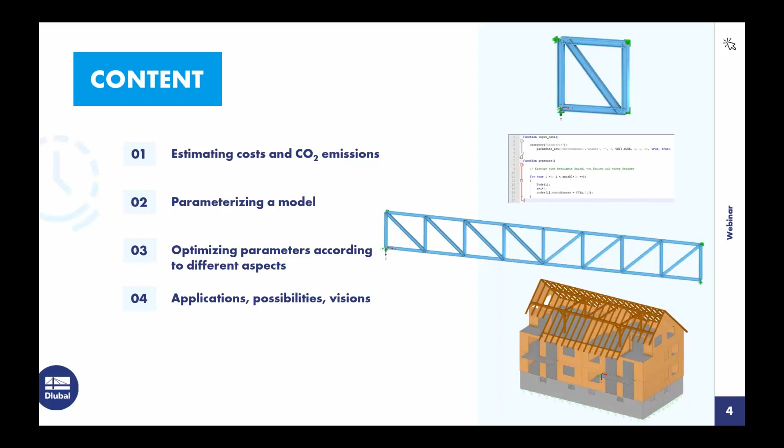So now it's time for me to change to the program because I want to show you this live today. I close this window and jump into RFEM, our new generation program. Before we start with optimization, we have to first define a new model. For this, I define a name, for example PO1, and specify the tasks I want to do. When I speak about essential tasks, I always change into this register, add-ons.

This register shows you all our add-ons available in the program: design, analysis add-ons, special solutions, and here our focus add-on today, Optimization and Cost/CO2 Emission Estimation. I agree, a quite complex name, but it should show you what it can do. It also has a special place in this menu: it's not allocated to special solutions or analysis add-ons. It's in the lower right corner to show that it globally covers the design add-ons, but also the other add-ons. It's lying like a skin over everything, because if you want to optimize something, you have to consider nonlinear material and also designs.

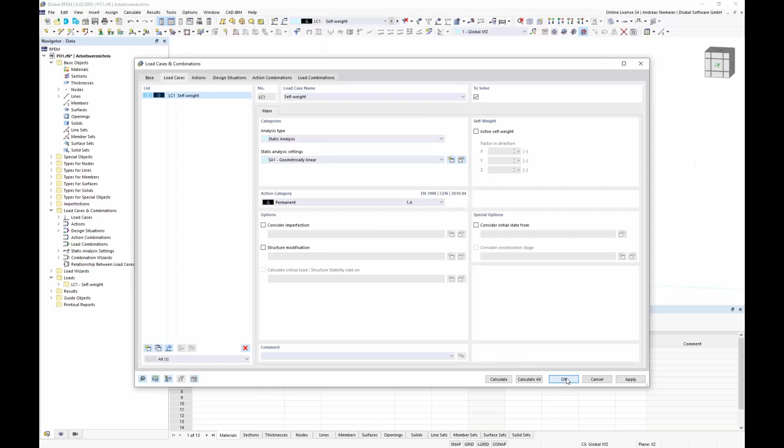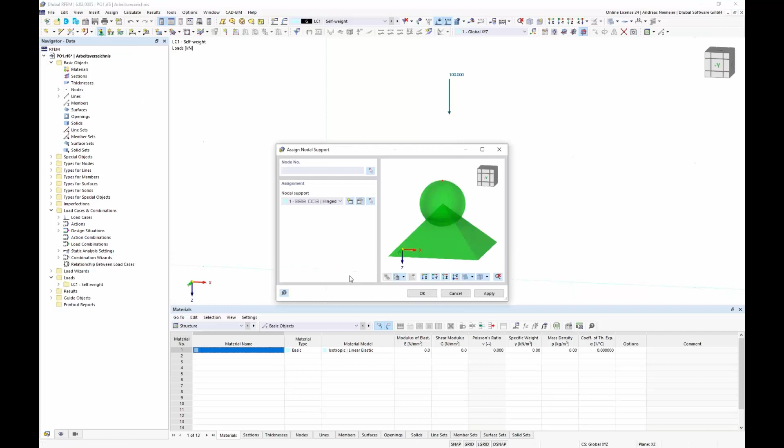So this means I want to load this element with a typical load, let's say with a unit load here. So no self-weight. I apply here only a nodal load, for example 100 kilonewtons, and this 100 kilonewtons should be carried from this element to 2 nodal supports on the left side. So here the nodal support is on the bottom corner, a translational support in all directions, and on the upper side we make also a new nodal support, but without having any constraints.

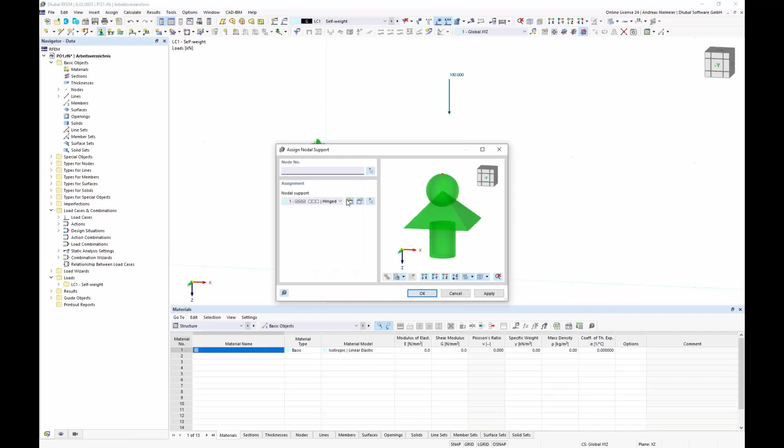So I place it here. And so that this structure cannot rotate around the global z-axis, I place also here 2 supports in y direction. So these are my boundary conditions and should show you my target place where I want to operate now. So if you see this load and you see these supports, our task is how we can carry this force down to these supports.

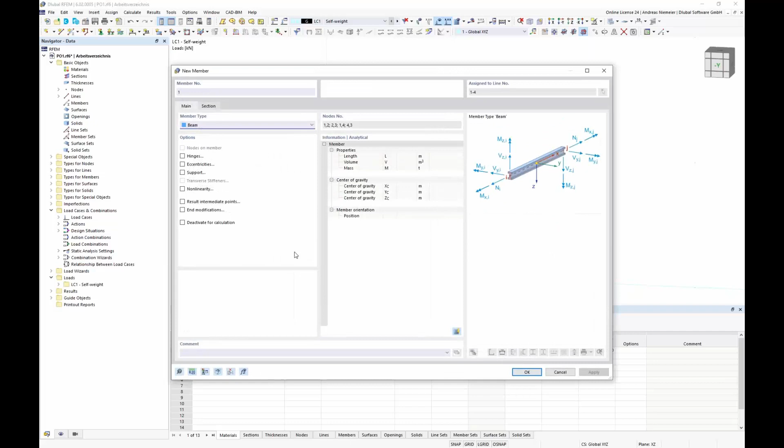I can create here now, for example, a wall or a member set or a mixture of both or a solid. So everything is possible. But for explanation today, I use simple members. So I select all 4 lines and assign a member here. So go to options, member. I take here the member type beam and assign here a cross-section.

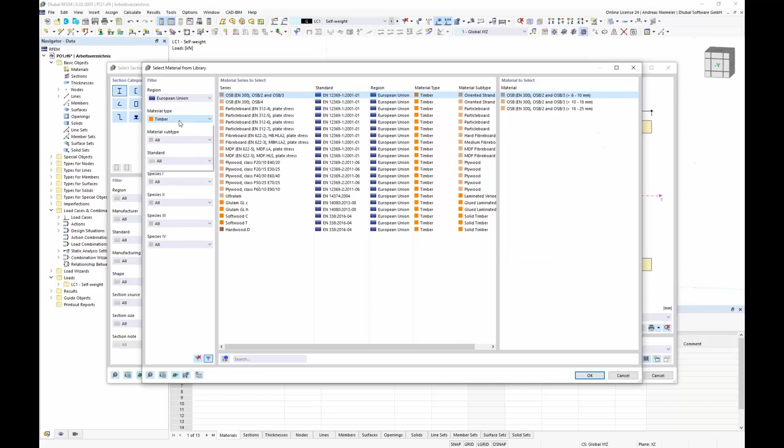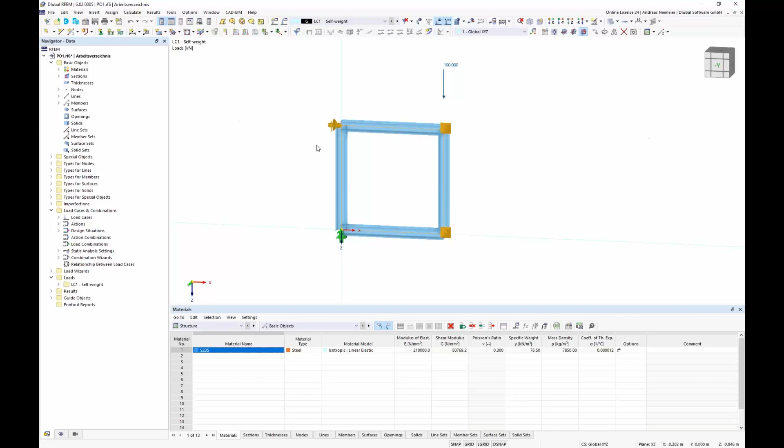For such examples I always use my favorite cross-section, an HEA 100, of course with writing a space here, and I select it here with a standard steel, so steel S235. So okay, after confirmation we get now these 4 HEA members. They are connected, rigid, but this plays no bigger role here. It's only a structure that can carry the force down to the supports. This we can also check.

So if I run the static analysis, you will see that we get here, of course, deflection. So we have here 14 millimeters deflection, and of course we get here internal forces, axial forces, here tension, here compression, and even bending. So we can realize that this shear is transported via bending to the supports and produces here reactions.

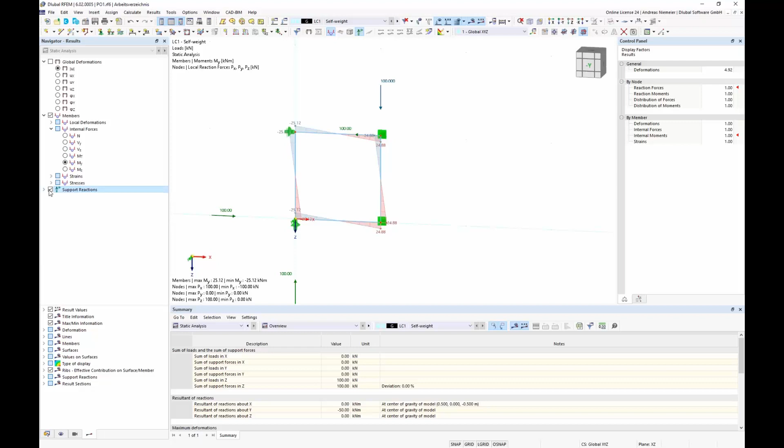So far everything is as expected, but as structural engineers, if you see this structure and even if you see this deflection shape, you would say, yes, nice structure, but we need a bracing in it. And I agree. I would also model here a bracing, but I don't want to tell the computer now what is the perfect place of the bracing. I expect from the computer that it will tell me what is the perfect place of the bracing, and therefore I say here now, please have here a bracing in the middle.

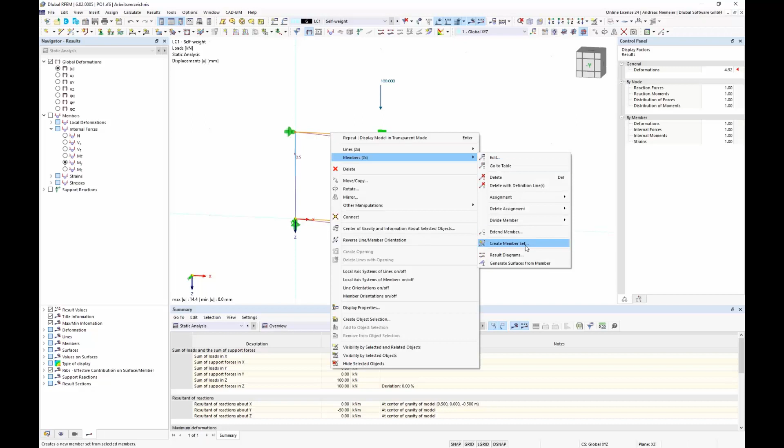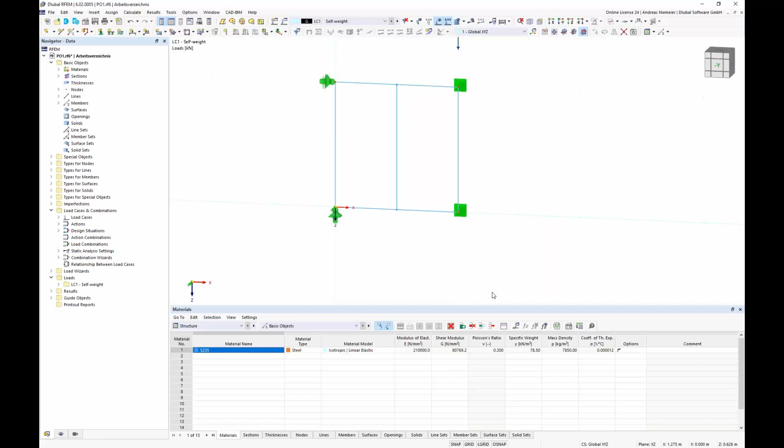So I divide the member with intermediate nodes, create here a middle node by placing the node on member, and then I take here one leg and copy it here in the middle. So far we have now a bracing. I don't want to say now if the place or orientation is good. It's only a, let's say, stupid bracing.

And if we run analysis again, we will see, of course, this bracing increased the stiffness, and we could reduce the deflection to, let's say, 8 millimeters. But the deflection shape is still the same, and we can think about the orientation or inclination of the bracing. And I would say now this is a job for RFEM, for the computer itself, so that RFEM can find the right place for this bracing.

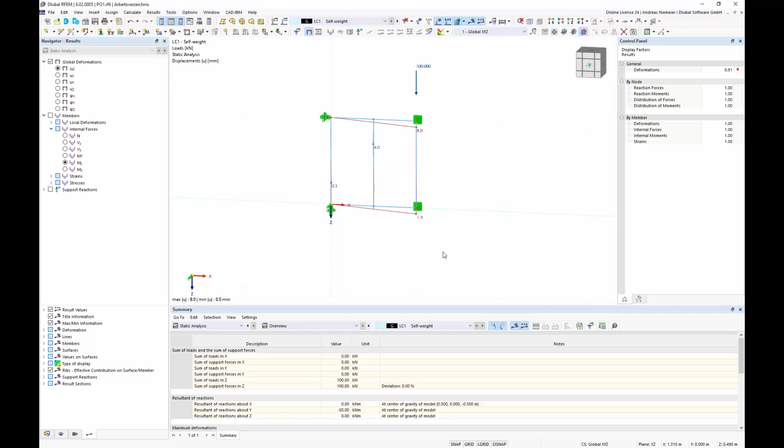We have to give the computer the information what it can change to find the right place. And here it's clear for us we can maybe move this node in left direction or right direction here, and even here move the node in left or right direction.

And if we define this variability, RFEM has an option to find this place. So at first we have to specify this variability to start this searching process. And maybe you noticed it when I divided this member: you see we have here red nodes, we have here blue nodes. So this blue node is a special node.

It is a node on member and gets its place according to a distance from member start and end, but lying always on the member. So it means if I change here from 0.6 to 0.7 or minus the distance, the node will move. And this is exactly what we want.

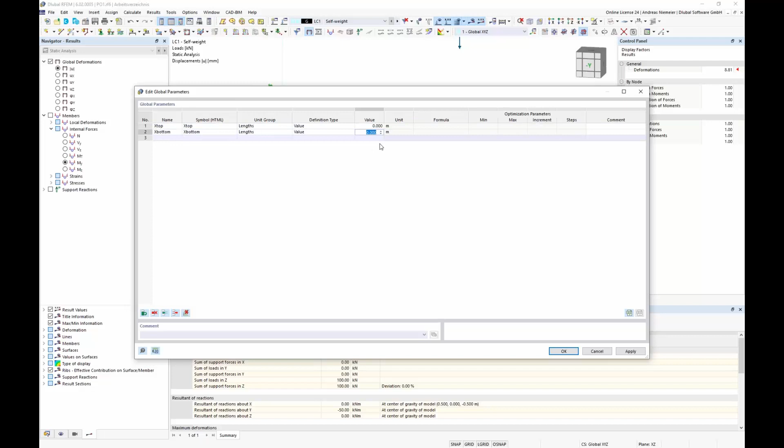And for this I define two parameters. I go here to Edit, Global Parameters, and here I have a parameter list where I can specify, and I say the first parameter is x top, and the second is x bottom. So the parameter gets the unit type length, with, in this case, 0. Of course, I can write here a value, but I want to have here 0. And now I use this length parameter to move this node.

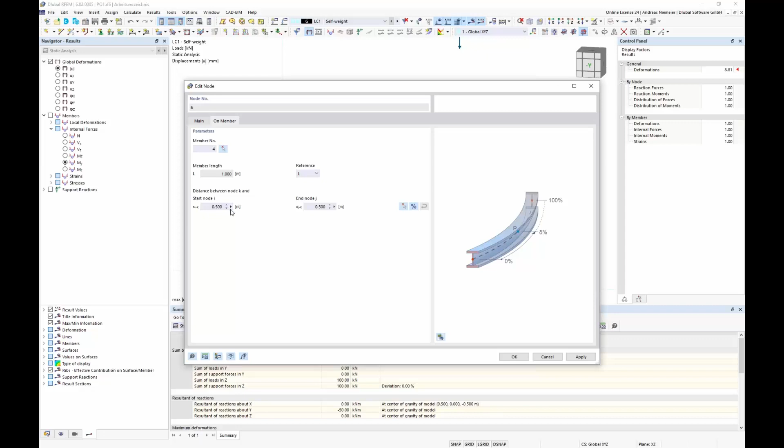And for this, you go into the node properties and change here to length definition, go here on this black triangle and open this formula editor. And you see you have here a big white box where you can write a lot, but we can say here 0.5 meter plus x top. And you see the program calculates directly the result of this parameter. It's 0.5 because x top is 0.

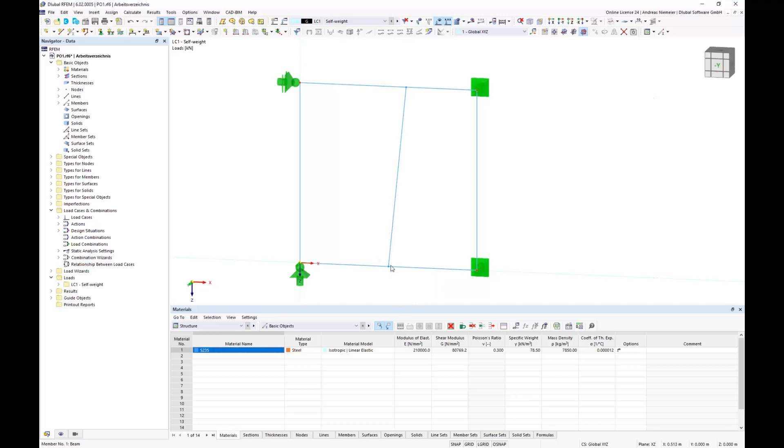But when we go now into this parameter list and change this parameter to 0.1, you will see that the program is moving this node. So we connected now the geometry to this parameter. The same we can do for the bottom. Here I want to go one step further. We wrote now in this formula editor 0.5 as a fixed value. But what happens if you move this node and it's not 0.5 but something else?

So to cover this, you can go into this node details, change it to meter or length as before, and open it again. But maybe you realized we have here two buttons. The button with this i is an information button which gives you a command list you can use to connect to properties of the program inputs. This is in JavaScript style and allows you to connect to every element of the program by JavaScript code.

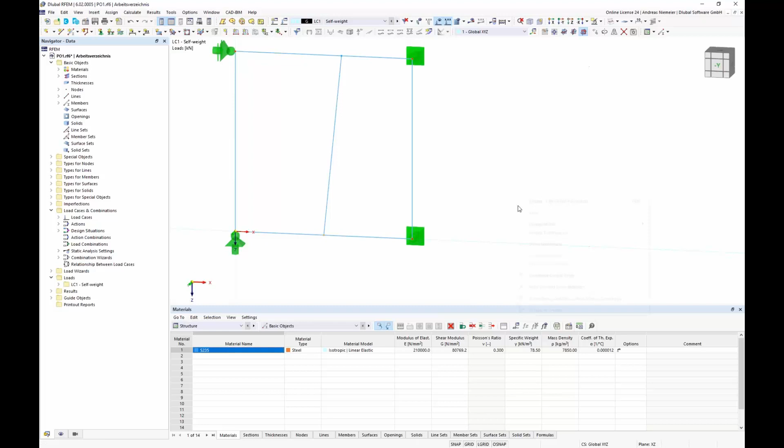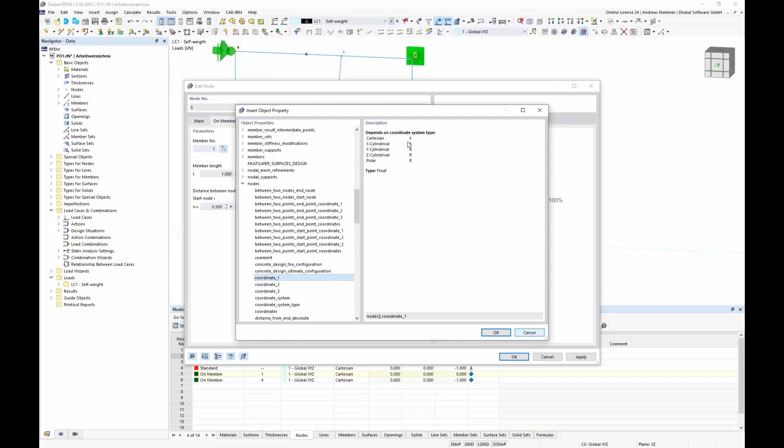For example, if we want to connect to the node coordinates of node number 2, then we can go again here in this node property, meter, formula editor, and type n, nodes, and you see you get here commands that touch the node, and for coordinate x you can connect here to the x coordinate. And if you confirm this command and write node 2, you will get here the value 1, which is written in the table, and this you can divide by 2, then we have a half meter plus x bottom.

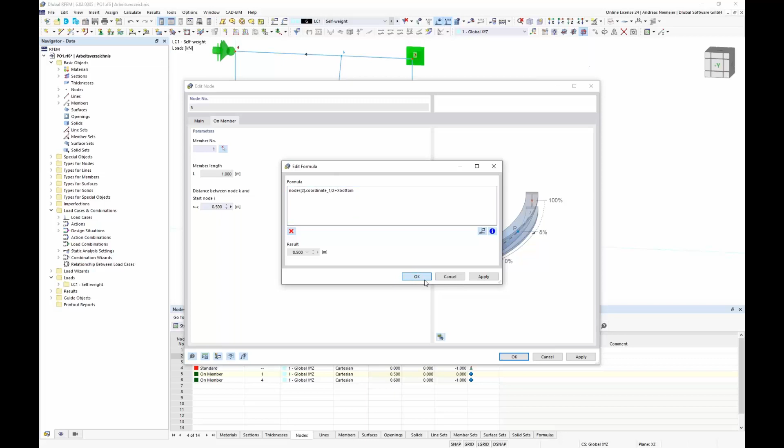And so you can write your own code to work with values of the input data itself, which enables you to make a good parametrization of your model. And now we have an option to change this bracing member in both directions by typing in these values. Of course, this is not the optimal place. It's much more optimal when we move it completely to the right and left side. But this is the task of the computer later.

So now we have done this parametrization, but the question remains how the optimization can work with these parameters. The optimization, which we activated in the base data here, enables you below Calculate the optimization settings menu. And you see here you have a few options and you have values to optimize. Unfortunately, this list is empty. This list is empty because we have to declare which variables of the global parameters should be optimized.

For this, if you open the scheme again, you will see that we have below the column definition type a few options. We have values, formulas, optimization, and some special types of optimization. And if you give this parameter the type optimization, you will see it's going red. This means something is missing. The cause is that it wants a range for optimization, from which value to which value the parameter could go. So I describe now the parameter should run from minus 0.4 to 0.4 with an increment of, let's say, 0.2, for example.

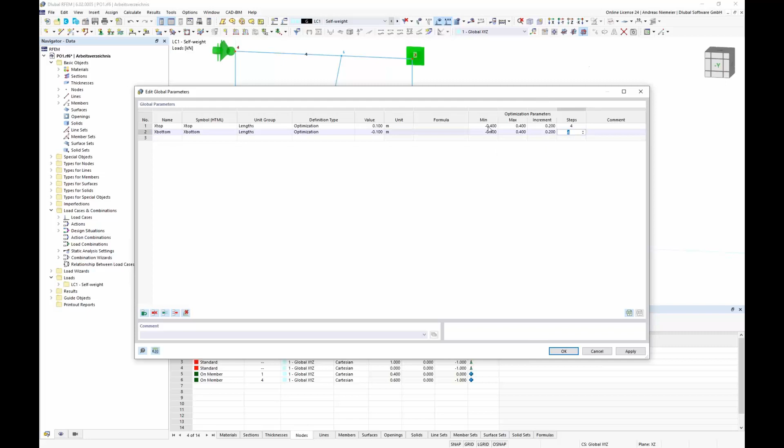And if we confirm this, and let's say we start here from 0, like in the beginning, and open here calculate optimization settings, you will see you now get these two optimization parameters available to optimize. Because we have these 4 steps, it finally ends in 5 states, and because we have 2 variables, it ends up in 25 different, let's say we call it mutations.

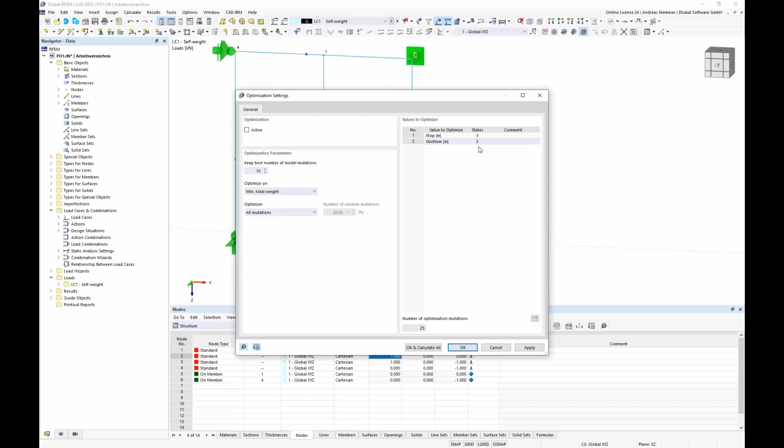Mutations means the value could have the first and here the second state, or the third and the 5th state. So there exist 25 different situations, which means for us 25 different models where we have different geometries in this case. And we defined here the name mutations for these different models.

And now if we want to find the best solution, let's say best in brackets, we can activate it here with this check, and you get 3 options to specify. The program asks us keep best number of model mutations, and here is written in standard 10. The question is best models. Of course, here we speak about 25, so it's not so crucial.

But you can also work with 1 million, then you don't want to read 1 million. So it's interesting only to store the best 10 results. But for our upcoming analysis, we can write all, only to understand what happens. Then, because the word best raises the question, what is the best? Here we have to specify below the chapter optimize on, when the program is changing these variables.

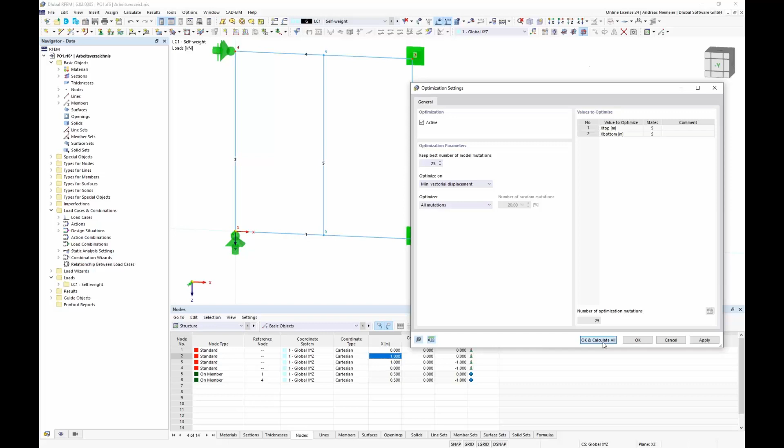And if we do this, and start here OK and calculate all, the program opens a calculation process, but it looks a little bit different. It's more an optimization process where you see which optimizations are done. And in the background you see what is changing. It calculates the different mutations, and when it finishes the calculation of one mutation, it logs it in the table connected to these 10 best results, for example.

Now we log down 25 best results, and you see it has measured here the vectorial displacement and the corresponding parameter set. The best vectorial displacement, for example, happened with solution number 5, if it moves the top node 0.4 meters right and the bottom minus 0.4 meters left. So this is our expected place, which is really good. All others are not so good, so you see we get bigger deflections. But of course it's a stupid process because it calculates all available.

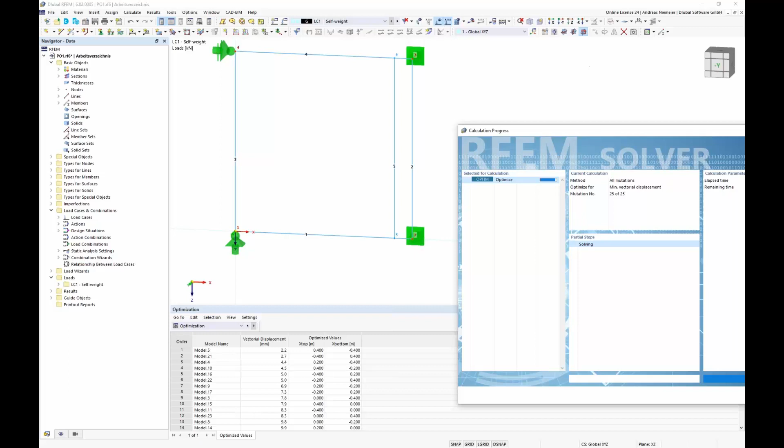And if we jump back now to our program, you see meanwhile he's already done with his analysis. He's on the 25th solution, and meanwhile the list is filled with the results I just presented to you on this matrix. Of course he also calculates some stupid solutions here, but this comes only from the process that we've tried to use all values.

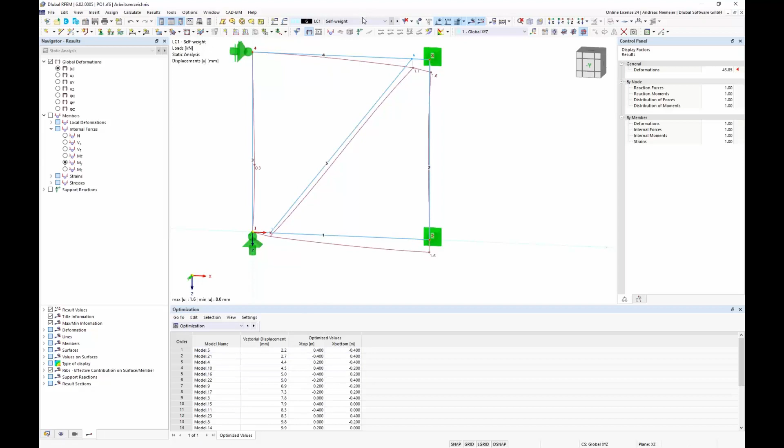And what I want to present to you with this step now is that you have to wait for the calculation of at least 25 models to get a result, to find out that maybe model 5 with this parameter layout gives the best result. We have here 2.2 millimeters, but this is only because the program is directly considering this design situation with increased values, where he has this partial safety factor, because when we calculate this, you get exactly this 2.2 millimeters.

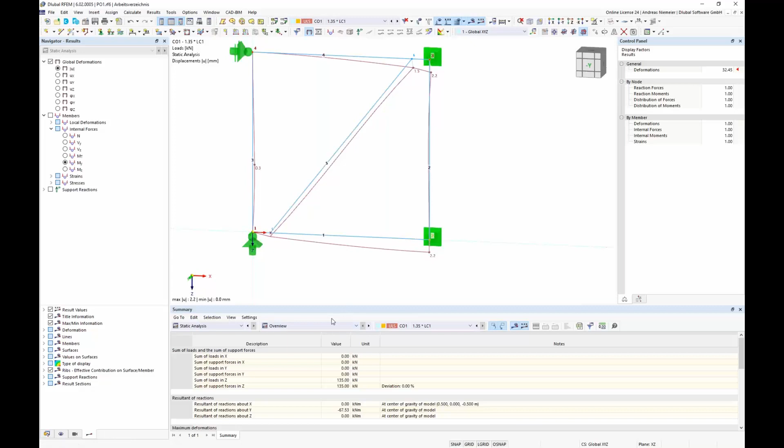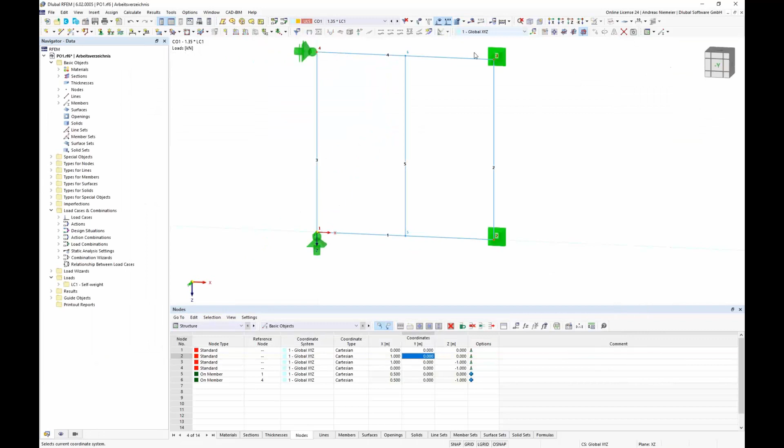So now the question arises, can we do this faster? And yes, we can. So we set this structure back to its original place. So this is the best parameter set he found. But we ask the program again to find this solution much faster with a learning process.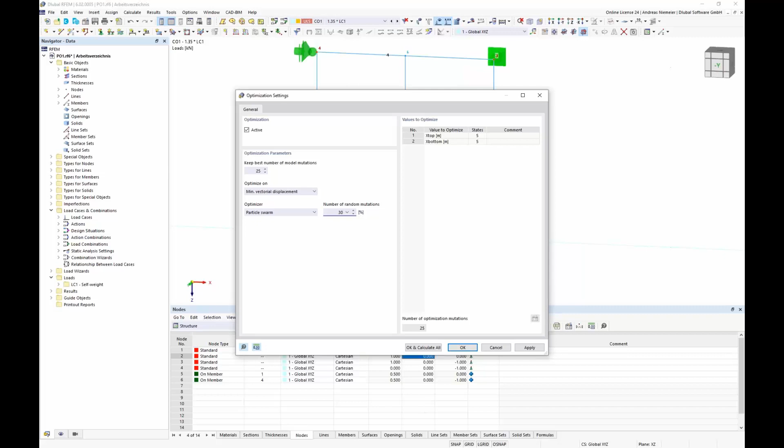And here we go back to this menu, optimization settings, activate it again, and say now, please use as optimizer this particle swarm algorithm, which is a learning process, using only a fraction of all possible variants or mutations. So I give a basic input, for example 30%, which means 7 elements of all, and the task is now to find a good result within the calculation of 7 mutations. I start the process now.

For this he has to start with a random selection of parameters, do the calculation and realize, okay, my first calculation gives a not so good result. Then he tries to find a better parameter set by knowing what gave him a bad result, finding a better deflection until the 7 mutations are over. So his game is to find a good solution within the 7 solutions.

And you see now the program was able, by using this self-learning process, to find a really good solution within the calculation of 7 models. Maybe here he already found the best solution, but this is not a must-have. The point is more to find as good a solution as possible, but you can save time with this process, because he learns that he has to change the parameter to get a smaller solution, and that he shouldn't increase the value in this direction but rather in this direction.

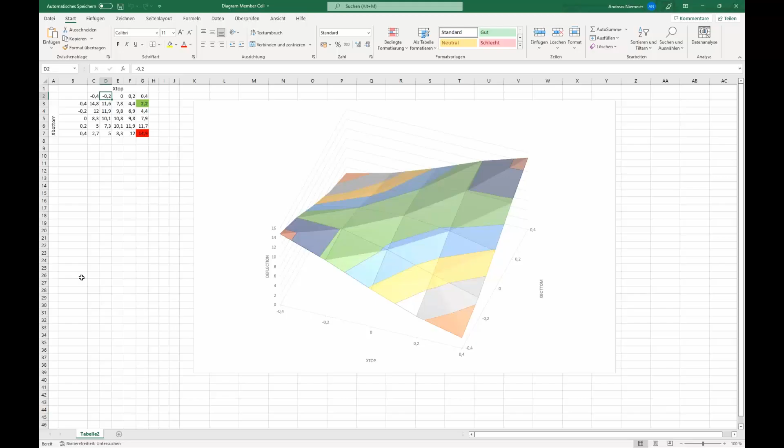And because these swarms have a need to rest, and the closer they come to the resting place, the more this need increases, mimicking this behavior helps to find these optimums here in this corner or this corner. So maybe we could prove this a little bit with this short introduction.

And now I want to open this topic by mentioning what we can use this for, because if you take a look at this cell, it's part of a truss girder, for example. And now the question could arise, thinking of my life as a civil engineer, if you try to use a truss girder for supporting some loads, how many cells should I have? Do I need 10, 20? I don't know. Then I can change the height of the truss girder. It's also unclear, and even the cross section.

What is always static or fixed is the length and the load. I cannot change those so easily, but what I can change is the geometry of the truss girder. But if you take a look at this current parametrization, you will see, yes, of course I can use it for truss girders, but this technology allows me only to change length and not the number of elements. And I agree, this is not possible here, and this is maybe the limitation of our old generation, RFEM 5. But with RFEM 6, we got a new mighty tool.

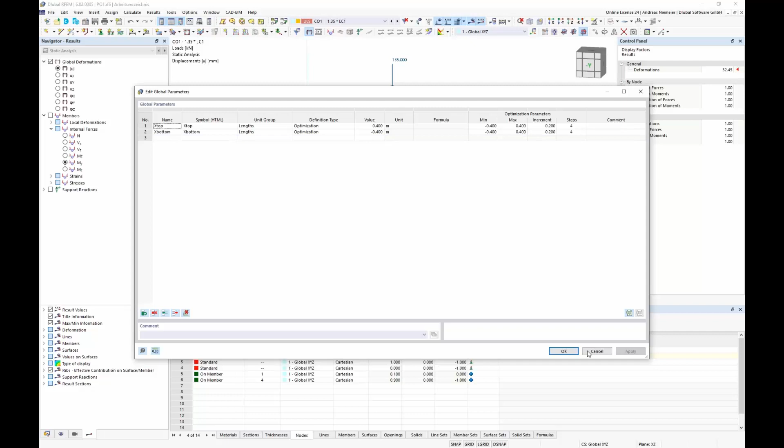We got this, let's say, JavaScript technology, what I just showed you before, where I can write per code elements. And I want to open this case here by opening a new model where we

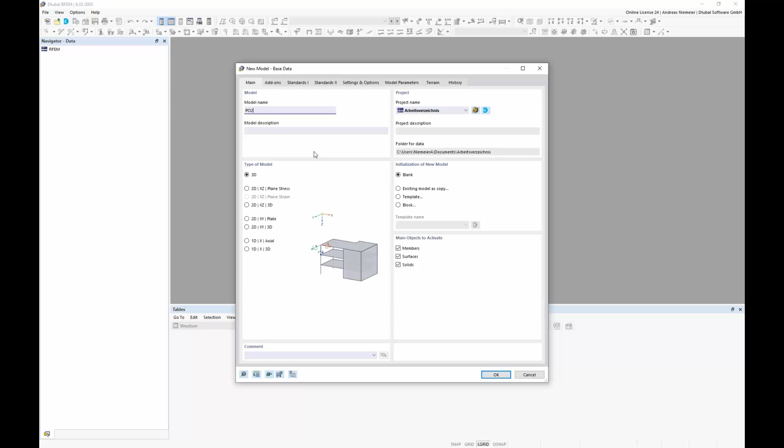create us, maybe here PO2 or truss girder, or not a truss girder, then more, how to say, I want to show you how you can create by a parameter new elements, what represents our task for a truss girder, because in a truss girder you also have to say, I need 5 cells, 10 cells, what means more members or less members.

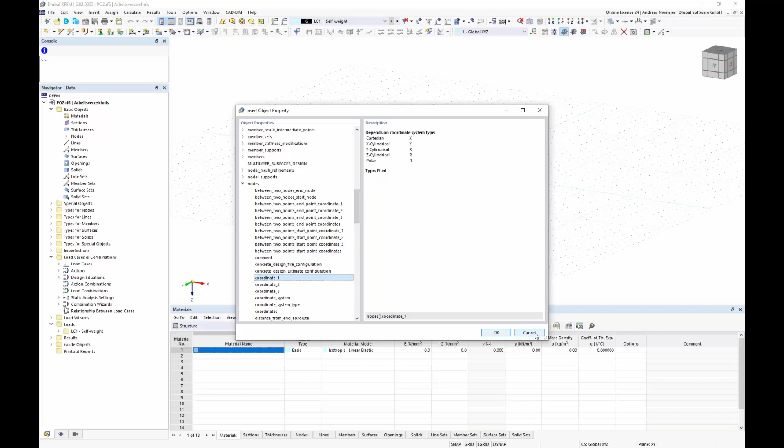And I want to show you now with the next sequence how you can control the amount of elements by using all these functions in the program. And here, as mentioned before, we have in RFEM 6 this JavaScript command catalog where you can connect to any element in the data block. And we have additional here a script manager what allows you to store this stuff.

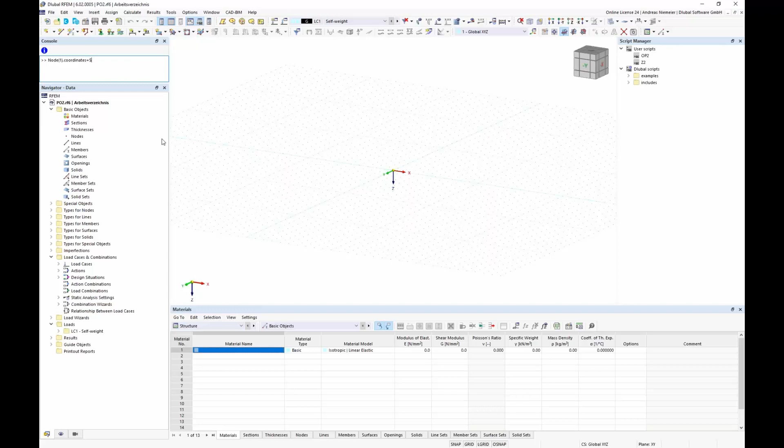How is this working? At the moment it seems quite cryptic, but for example, we want to specify a new node. So we can write in console by first checking the command for it. For example, we want to create a new node, maybe here in parentheses, node 1 dot coordinates, and the coordinates are a vector on the place 1 meter, 1 meter, 1 meter, for example. So with confirmation we can create now here a new node on 1, 1, 1. So this is possible right now.

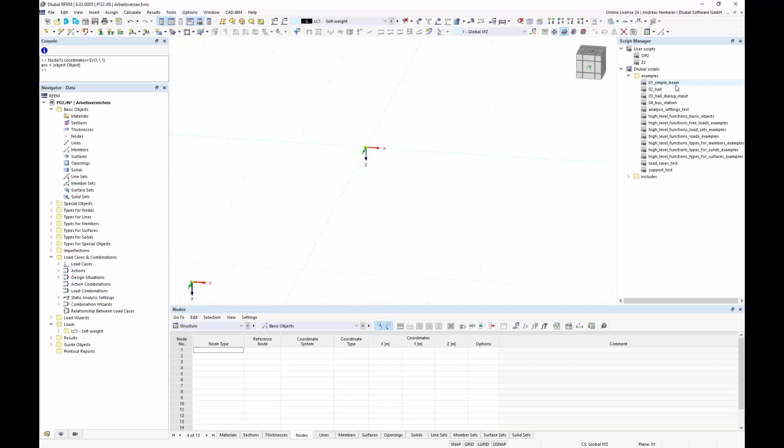Yeah, you can define on this console new elements, not only a node. So there's more possible. If you see in the script manager here on the right side, you have here, for example, a simple beam. If you double click on the simple beam, you get miraculously a new simple beam here with supports and loads and so on. So even you can create complete models with this technology.

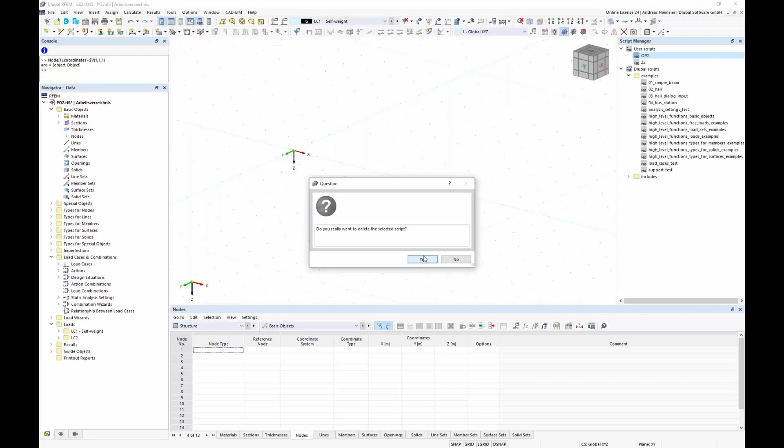Let's increase this topic how you can create such a script, because here we only use this console. So I copy this command, Ctrl-C, and create here a new script. So this last we delete, yes, and make here new script. We call it PO2. Okay, and then we can open it with an editor. I use here this Notepad++ editor, but you can use any editor what you want. It's only a JS file,

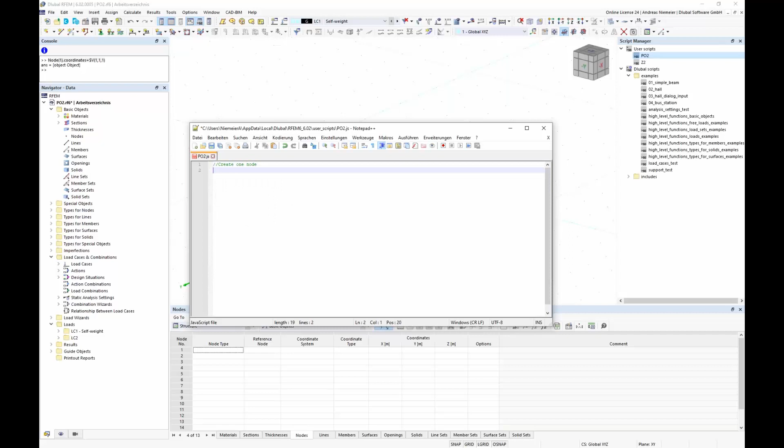and here we can write comments. For example, create one node, and I insert what I just wrote into console. Node 1 coordinates and so on, and I store this and double click PO2, and you will see you get this node again. So here you have the chance to write down what you want and store it in these scripts. So not so crucial, I would say.

Now back to our idea. We want to create more elements at once. How can you do this? I delete this again and open here my file and say, please create more nodes on one line. How to do this? If you work with more elements, you have to write, for example, a for loop. For a running variable, for example here, variable i, which is 1 in the beginning, he should increase the variable until this variable is smaller 5, and he should increase i always with 1 increment

in this loop. So, and here in this running loop, he should do something. He should always create a new node with the number of i when he increases it. Then he should create for every step an x coordinate. X is, for example, i multiplied with 1 meter. And he should move this information as node in the node table. So write nodes i, point coordinates,

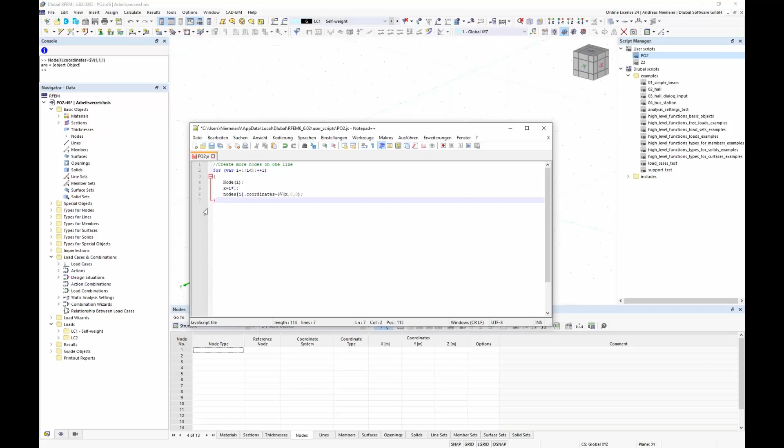and as vector again, dollar vector, and here we write x coordinate, comma 0, 0, that we have nodes on a line. And then we can close this command. The rest we delete, we don't need anymore, and can store this. And if we run this again, you will see, if I made everything right, we get a few nodes in one line. Because we stopped before 5, we get only 4 nodes.

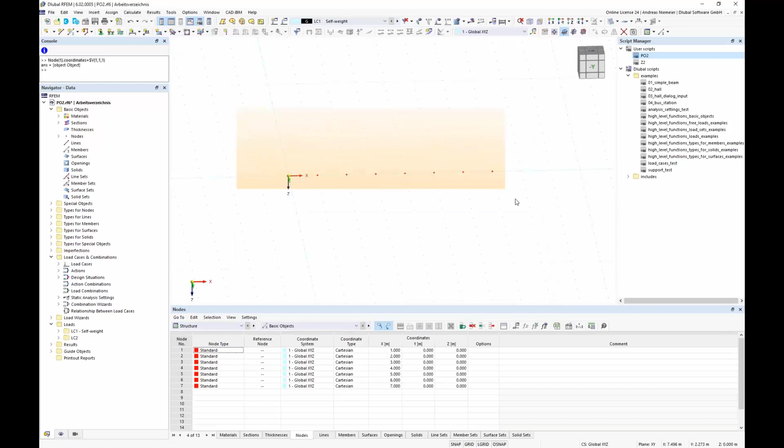Not so crucial. The only point is now how we can connect this parameter with the optimization here in this menu. And this you can do by using blocks. If you see here our blocks in the block manager, you will realize that we have here blocks for RFEM, different types, and if we open one block, you see it will create some structure.

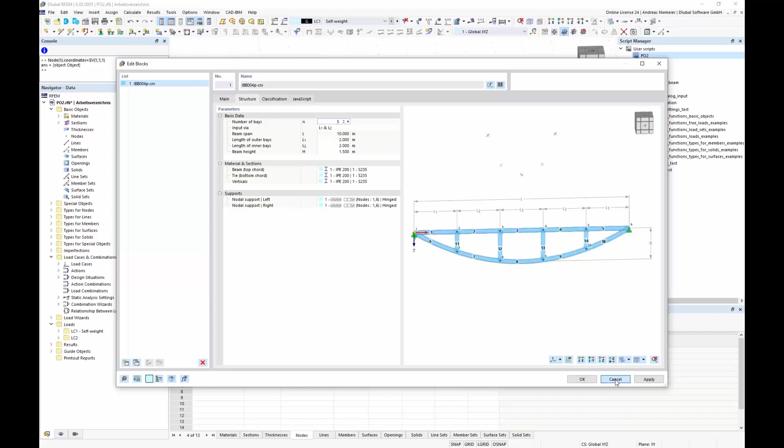It also has here in the back a JavaScript code with, let's say, here an input where we have these black triangles again where we can define something. And now we only have to take our code with these nodes and move it into this block logic. This is not so big a deal. It's only that we have to write here in the front that it should generate something.

So we need here the keyword or the function, function generate, and make here a curly bracket again. So nothing more. And now we have to store this file here. I prepared a folder for today's presentation below my temp folder. And now I say in the program, please save this file as block, maybe name PO2. It should select it here below beams, for example, and I use this JavaScript file below temp2.

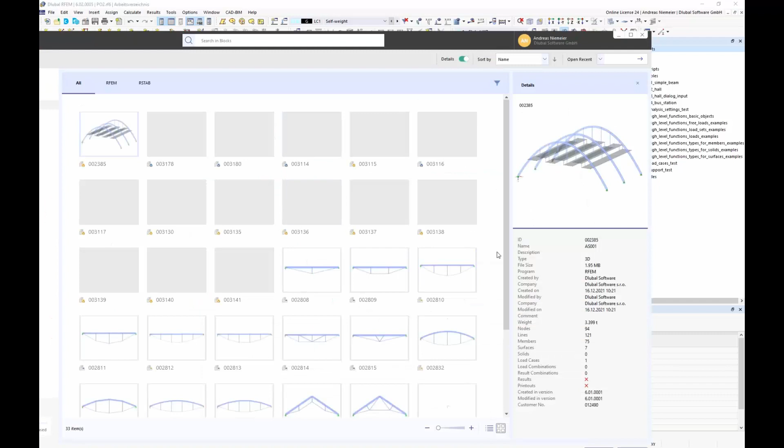And if I confirm this, the program is taking over this JavaScript file as a block into our block manager. And if we open the block manager again, we will get this block here. Let's search here PO2, and you will see we get here our nodes, 7 elements. Here's our code, everything clear. And now let's connect it, and we see we have no structure, because we didn't define it. It's clear. But now we do the last step and connect it with input.

And for this, you can open it again here and add an input block. We say here function input data, open here a region, and write down a header, for example, category, geometry. Of course, all commands I'm using here, we have a documentation we can send you afterwards. Should not be the deal. I only want to show you how it's working in the basic concept.

And below this header, we want to specify a parameter. It's an integer parameter, which has some properties. It has a name, and the name is amount of nodes. The next is the parameter internally encoded, amount, which we use here below. Then a unit should not be specified for this integer value. The starting value is, for example, 4 or 3. The unit type internally is unit.none.

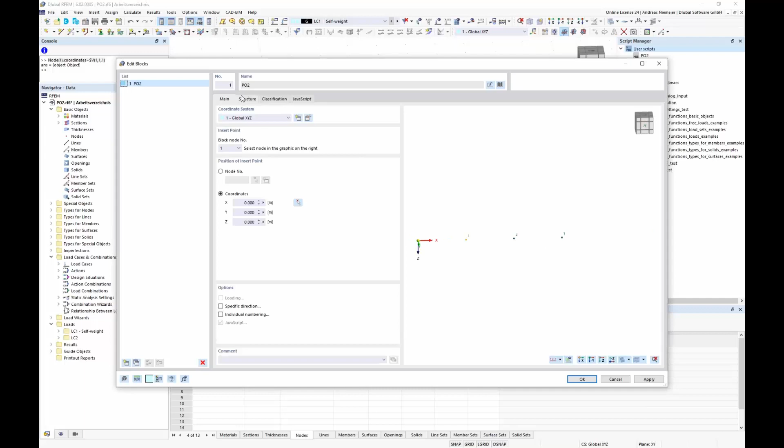You will get here in the block manager below this PO2 our 3 nodes, and you can change it here to any value. And now we take it over in the program, and you will see that you can have this block not only as simple nodes, but as compound elements below special objects, where we have this PO2, and we can connect here any parameter from the parameter list.

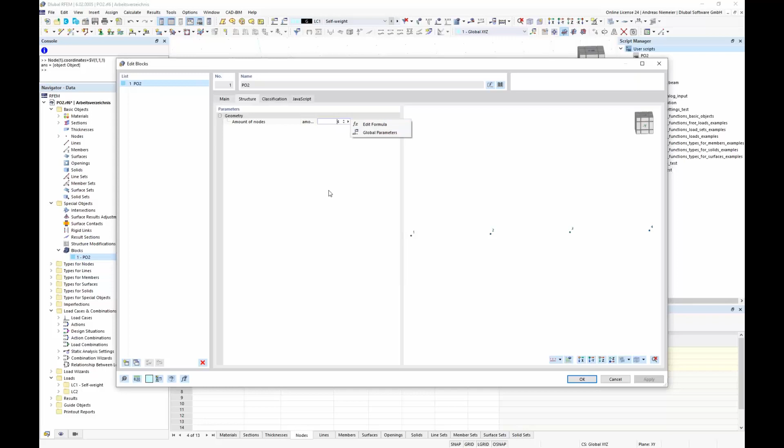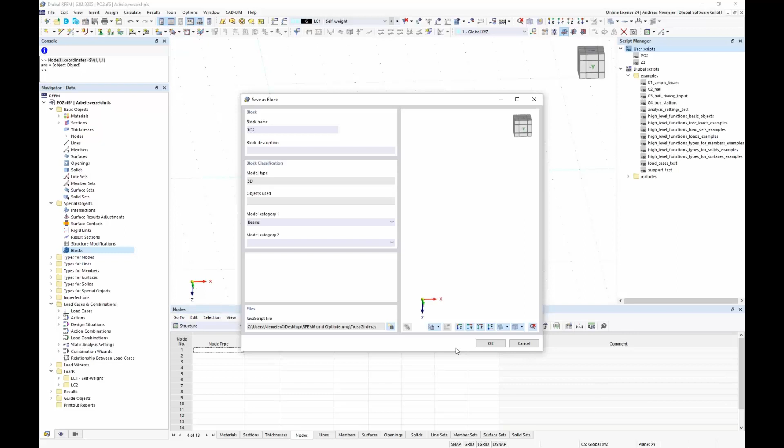So with this idea, we go back to our truss girder and use it. So we delete this again and use now a predefined file for a truss girder with members I prepared for you. And I save it as block, Truss girder 2, for example. We place it below beams, and I have here a file, truss girder, prepared, which is not only modeling nodes, but also beams and loads. And we read in this file as a block.

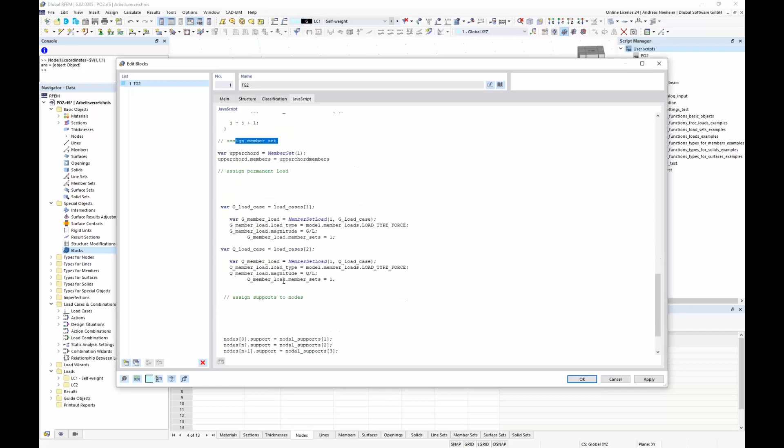And get this block here, TG2. Then you see we have now here a block which writes us an input file, function generate, nodes, member sets, loads, and so on. And here we can now specify we have 8 cells, we have a span of 20 meters, and we have a height of 0.5.

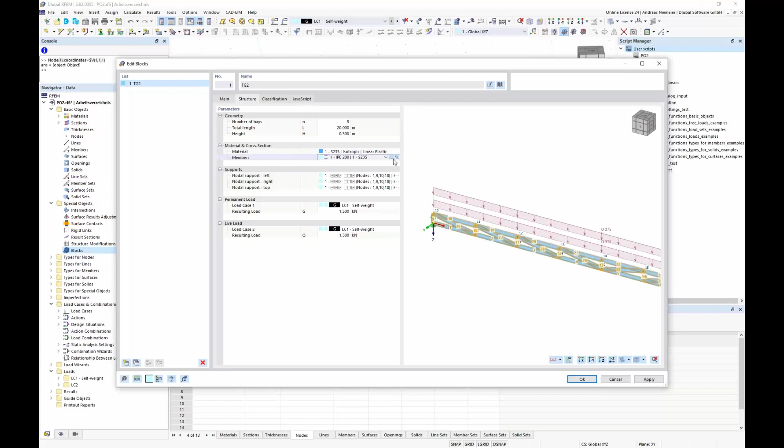It should start here with the material S235 with our favorite cross-section of our HEA. We go here in the library, HEA 100.

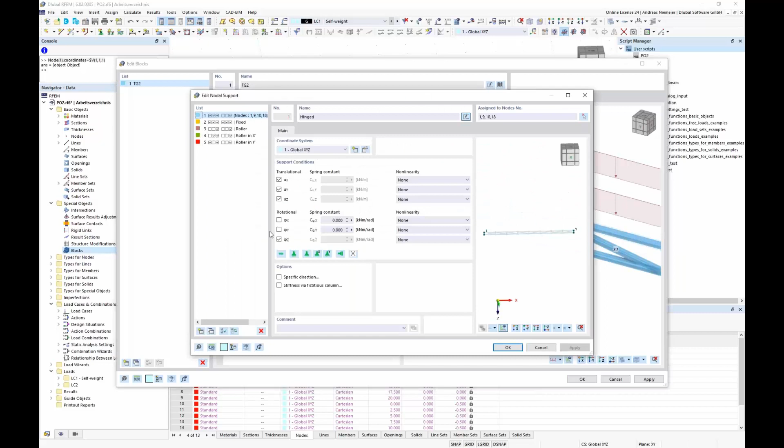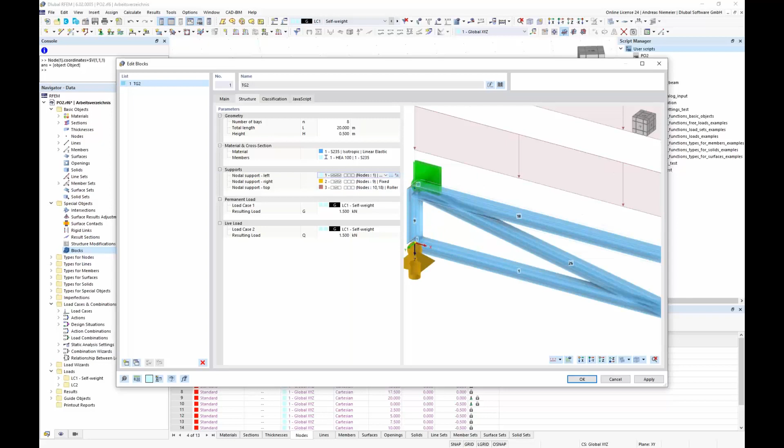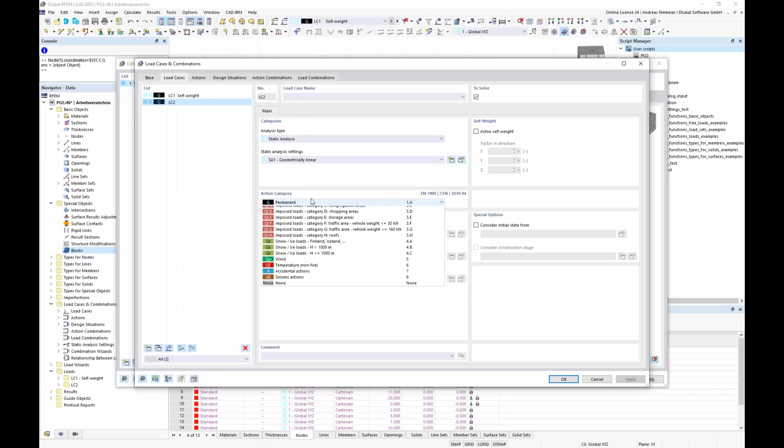And we have here also a clear support, and for the loading I defined it so that we get the sum of loads. For example, I have to carry 100 kilonewtons, which will be distributed homogeneously over the full length, and as load case we have a self-weight and maybe a live load or imposed load, and here we have to carry 200 kilonewtons.

And with confirmation of these inputs we get here our truss girder system with 2 load cases, and now we can connect it to the optimization. So we connect here our optimization. We specify here our parameters, for example cell, which is an integer value. So we go here to model integer and write here, for example, 4, and because it's an optimization variable we say it should run from 4 to 10 with an increment of 2.

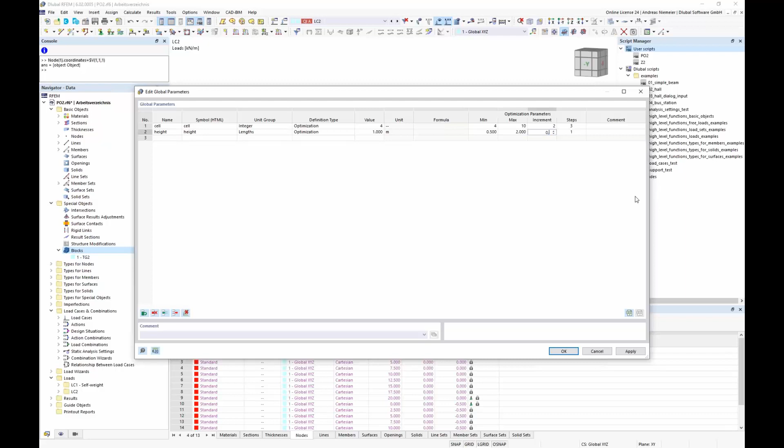And again we have, for example, also a height parameter. Here we have a length parameter which we set to 1 meter, and it's an optimization variable where we can say please run from 0.5 to 2 meters with a step of 0.5.

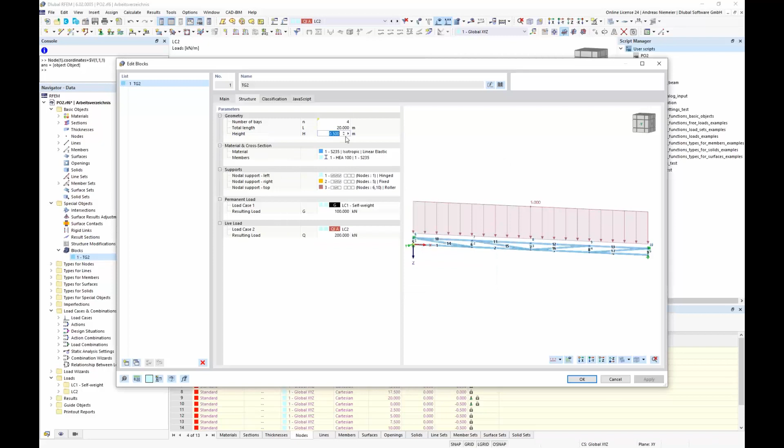And now when we use these global parameters, optimization parameters, in the variable block and connect them here with these inputs, formula editor, cell, okay, and height, okay, and confirm it, the program says you have to modify the geometry behind, and you see we have now connected these global parameters with the block, and it uses the code to change the structure, not only the structure length but also the number of elements.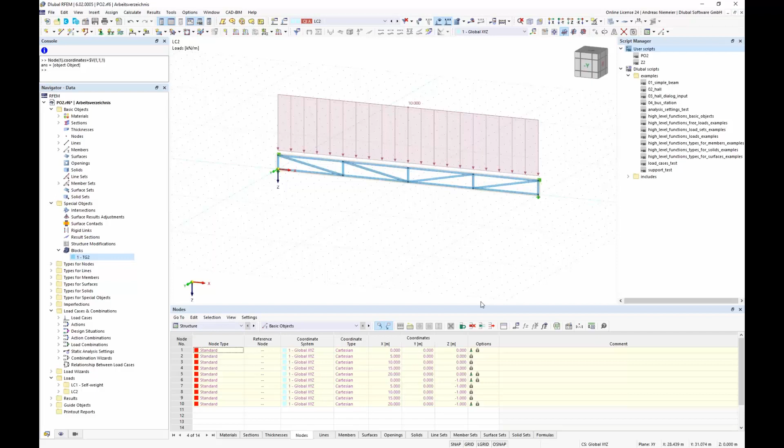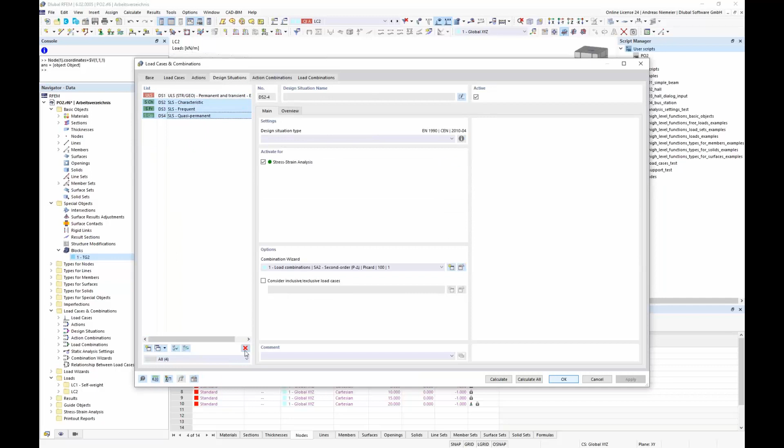And of course if we calculate now the structure, for example here also with stresses, the design is not important. Only when we activate it, it will be considered. So, so that it's not taking so much time, I reduce this combination, serviceability, and here we use only linear calculation and calculate all, and you will get the result, the deflection result and a utilization result.

And you see we get here a deflection of almost 300 millimeters with a utilization of 5.06 so far. And this means we have to get a better layout of the structure for a good structure.

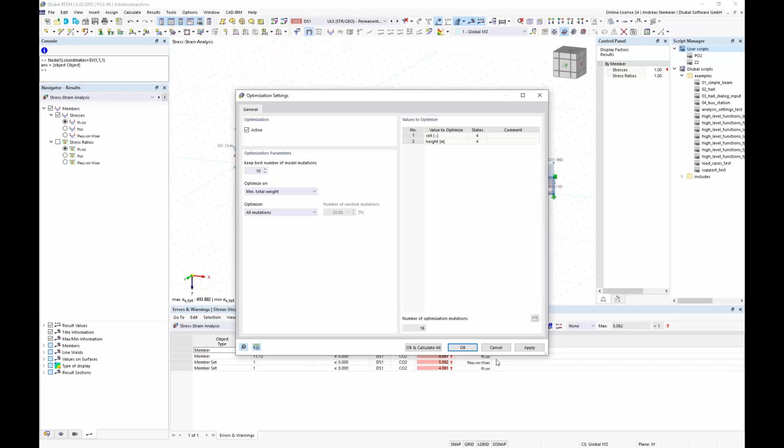And now if we run the optimization process here, if you check here, you see we have at the moment only the cell and height parameters, and the question is how I can change cross sections and how I can, for example, optimize according to cost. You have to specify here below section, edit the optimization. So if we check this, the program knows it should optimize all HEAs in one row.

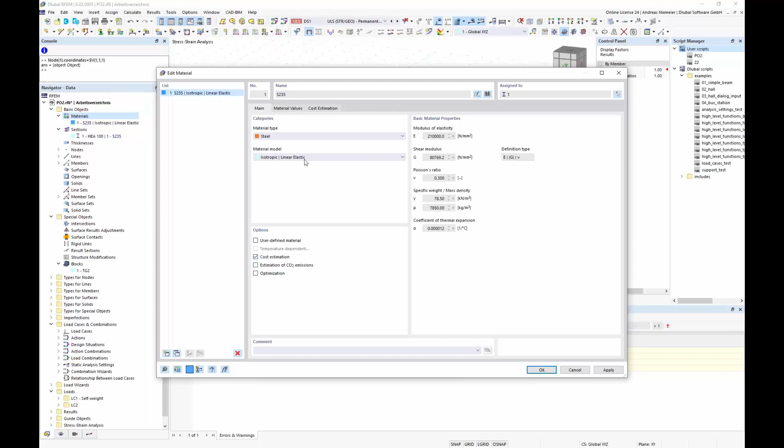And if it should optimize according to costs, you will see you get here below the materials the option to activate the cost estimation and the estimation of CO2 emissions. And if you go to cost, you see you get an option to estimate for solids and surfaces, which we don't have, and for members we can say the weight of the member is, for example, 1,600 euro per ton.

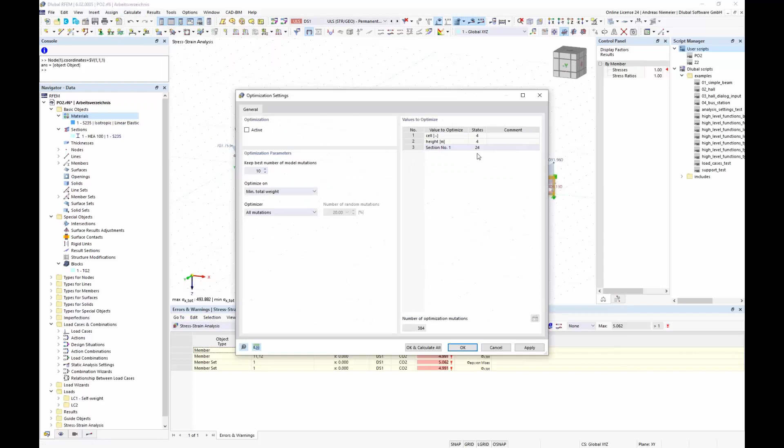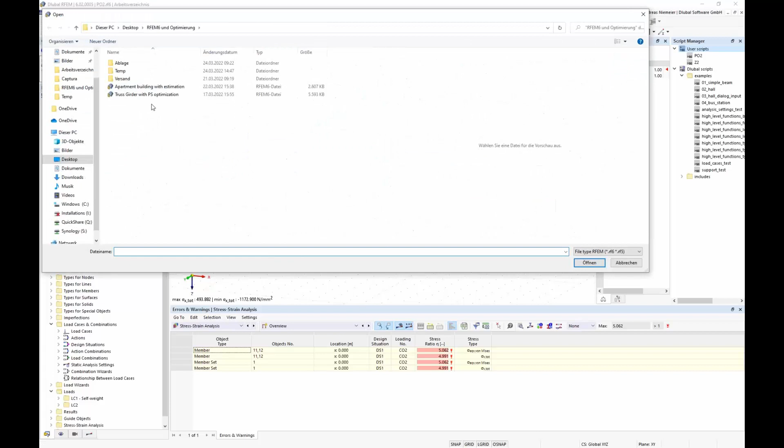And now if we go back to our optimization settings, you will see even the sections appear now as parameters because we activated it here, and this ends up in 384 mutations, which takes a while to calculate. So we should only work with a fraction and use the particle swarm. I don't want to start the calculation now because I prepared it with final results, because I don't want to wait for the calculation of these mutations.

But with calculating 40 elements of these 384 possible solutions, you get here a list, and you see the optimization result is ranging between 40,000 euros and 4,000 euros. So those with HEA 1000 are uninteresting. But if we take a look at this fraction here, you see with 10 cells and a height of 2 meters a HEA 160 is interesting, and with 8 cells and 2 meters a HEA 160.

And we're playing here, maybe we can reduce the amount by 400 euros or by, let's say, 1,000 euros. So there's a game to earn money only by finding good parameters. And this is, I think, quite an interesting topic to save money at least.

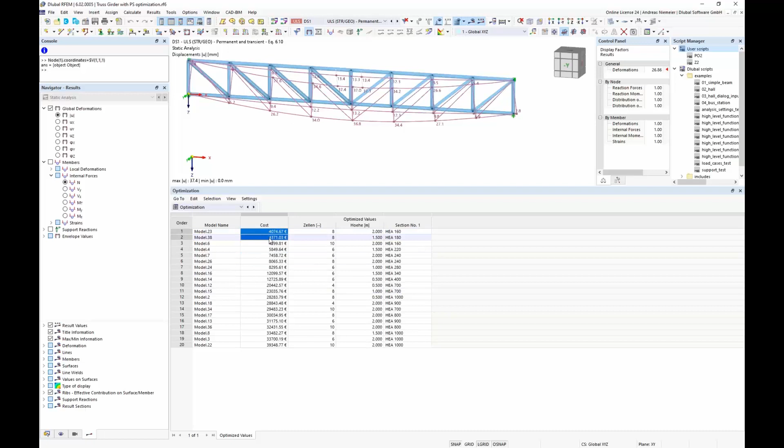So, and this is now not only to optimize this, as you just saw, coming now to my next point about these estimations. For these estimations, I prepared here a next file where you see you can use it not only for optimizations but also

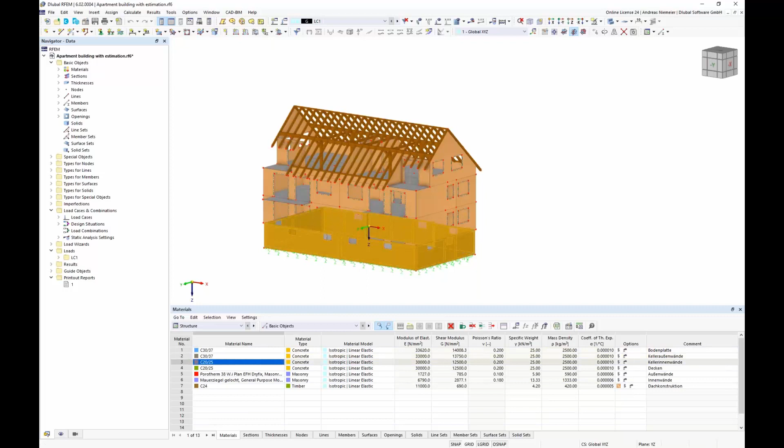for other topics. So here I have, let's say, a structure, a typical 3D model from our users where we have some organization below, where you see he organized maybe the slab, the outer basement walls, the inner basement walls, the slabs, the outer clay brick walls, the inner clay brick walls, and the roof construction.

And if you need it now for an optimization task or only for emissions or estimations, you can use this option from this add-on, because here, for example, if you only want to estimate costs, you can activate this cost for all materials and define for every type of element what should be covered or not. So you can decide if it should only amount costs for surfaces or solids or members, or even for surfaces for volume, and maybe for top faces if you have some finery or some painting

on it. So you can specify here some basic costs to finally get the amount of money of the cost for optimization reasons or only for some calculations. And in this example I used this logic of basement, floors and roof and specified here different parameters. I defined here euros per unit, and so I can estimate the total cost of 200,000 euro for these elements that I modeled.

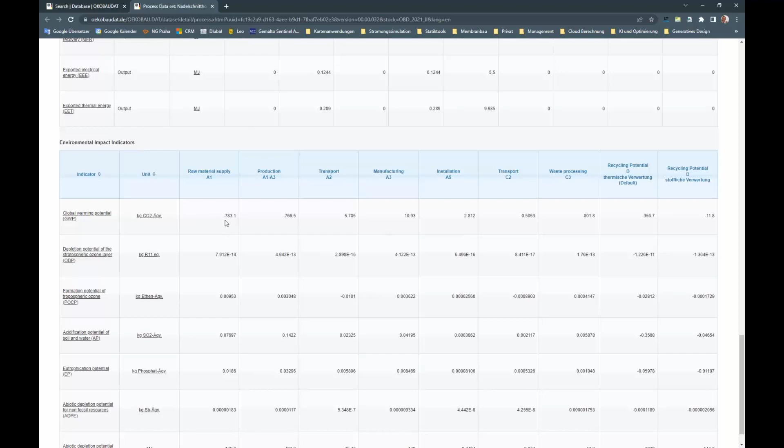I can change this also to English, where I can search for materials, for example here timber, and you get for timber, according to this indicator global warming potential GWP, the CO2 equivalent values. And what is quite interesting here, concrete and all others gave us positive ones, but timber has negative ones. And this is maybe what makes it interesting regarding optimization, because

here I can also consider negative emissions. Generally, if you do optimization it should always result the same if you use it per weight or per price or something like this, but regarding sustainability and with these negative values it could be interesting to optimize, and the program can find a solution with more timber, which is much better, so you can control it here with this.

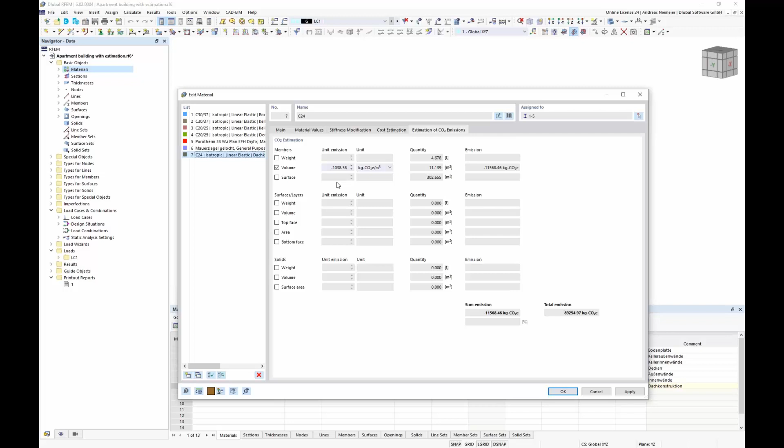Yeah, so with this add-on you get two parts: optimization and cost and CO2 estimation. In one part you get the optimization, which I showed you before, and in the material sheets you can estimate the cost and CO2 emission. But of course, as mentioned before, if you optimize something, you can rely on these figures here in this menu.

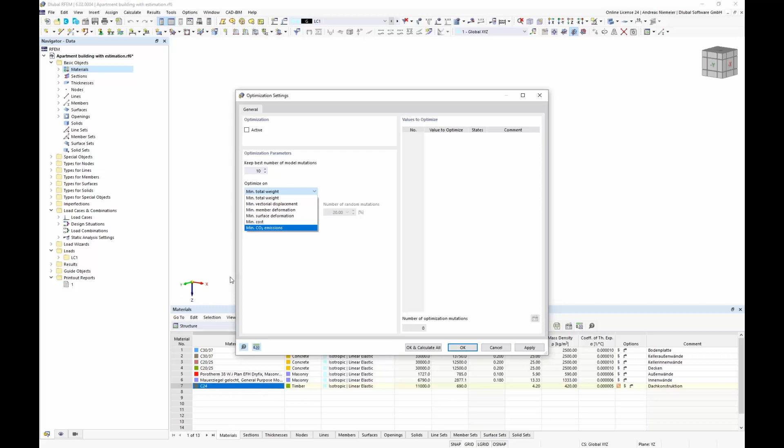So now I'm coming to my last point to close this webinar. Here I want to speak about our vision and the possibilities of this add-on, because it's quite special, and maybe sum up what I showed you today. Today I showed you that you now get an optimization machine in our program environment, call it like this.

And this optimization machine can find good parameters, and these parameters can be defined by yourself in your structure. Of course, you can modify or parameterize your structure by changing length parameters or load size values. This is quite easy and was the first thread that I showed you.

But as mentioned, with the new mighty of the new generation, you get the option to specify inside the program a JavaScript code which can connect all these inputs and can create new values in these tables to create new, or to grow up a new structure according some parameters which could be optimized.

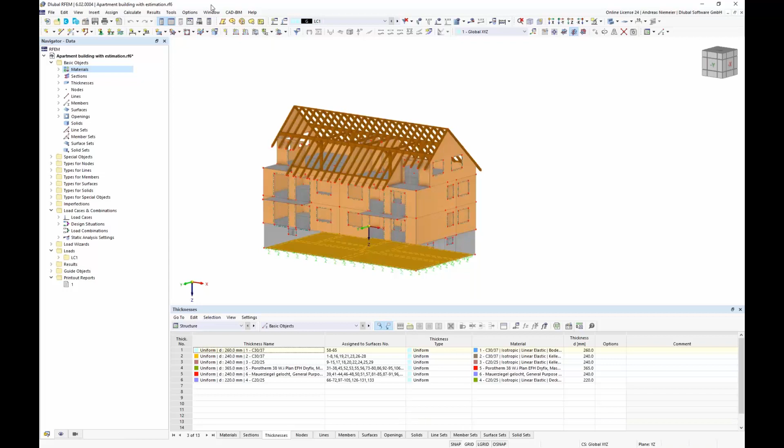And then a third stage, which I did not show, is that you can also create from several RFEM models, so from more windows like this, one big structure, and connect it via our web service to this optimization tool. And I think all these three options give you a really mighty tool in your hand to find good structures

for your work. And maybe an easy idea how you can start with such tools is, for example, if you imagine you have a steel hall or a timber hall, you can use this program to find a good distance between your frames, or you can use it for finding good distances of supports of continuous beams.

If you want to use it more advanced, you can use it, for example, to decide if you should use a frame with bending moment resistant frame joints, or if you should create this frame by cantilever columns. Or, as mentioned just before, you can use it for deciding if you should use timber or concrete or aluminum or whatever, according different reasons, maybe according CO2 emission reasons. So all these options you have, and this gives a lot of possibilities.

In our case, we have the vision: what happens if we let the program decide how the structural system should look like, and we create the process where you define, for example, the sizes of a hall, maybe length, width, height, and the place of the site, and then the program detects according to the loads on this site on the map or on the earth, which material, which frames, which distance of frames you need, and gives you finally a complete structural system.